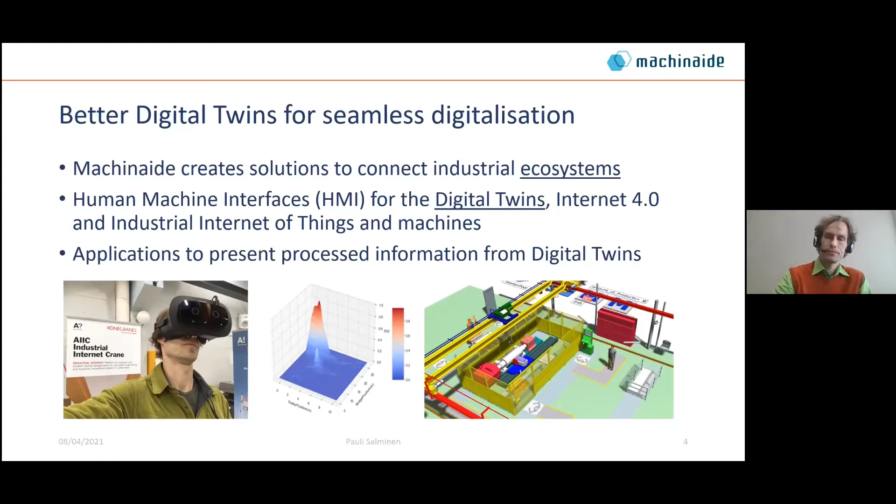The work in the Machinaide project has been divided into different work packages. To give some examples, the Turkish consortium is responsible for running work package 1, about use cases — I'll explain Finnish use cases briefly later. Then we have interoperability between digital twin ecosystems, which we are responsible for here at Aalto University.

Then there's a Dutch work package on processing of multiple digital twins' data, which we also participate in — some presentations today relate to this topic. Then we have innovative human-machine interfaces for digital twins and services, and today we'll see an example and presentation about this development.

Then we have information usage across the machine lifecycle, and a sixth work package about business models. This is mainly run by VTT here in Finland, about how to make business out of this development.

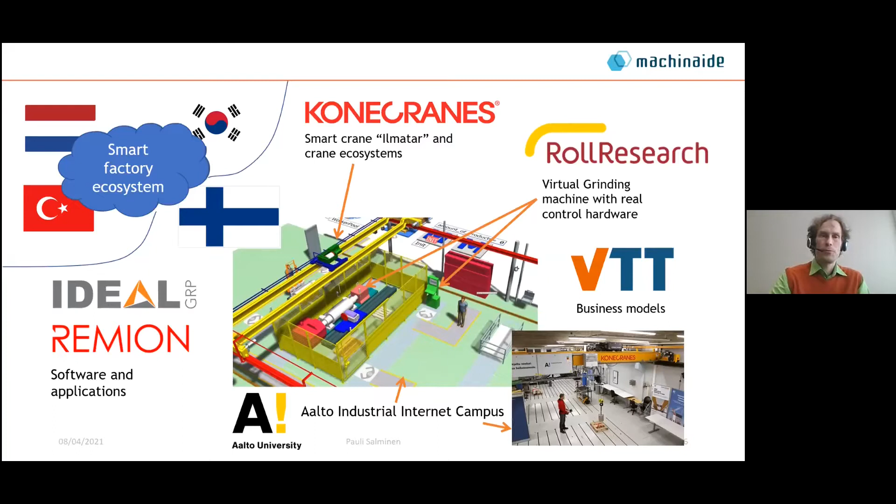I hope you now have a better idea how the following presentations are related to each other, and how these are related to this Machinaide project. Feel free to present questions, and I hope our following authors can also reply to some of your questions later on today. Thank you.

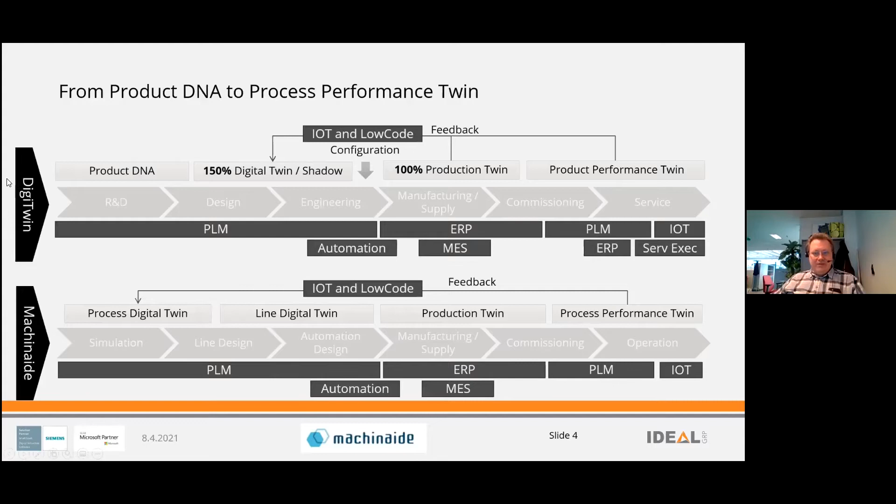So why? We wanted to basically start by understanding the basic needs, and our way of thinking is we want to add business value to just about everything we do. We have been running this with Jira, so we basically started with use cases, and we have a multitude of them. I took a couple as an example of how we were thinking about it.

We wanted to basically answer specific use cases. So you have cases like, if you are a manufacturing process supervisor, you want to be able to replay the actual process that happened. If something strange happened, you want to be able to view it, replay it, and get an understanding of the process.

Since we are connecting information from multiple places, we want you to be able to access it from one place. For example, if you're a service engineer, you want to be able to access the whole history of the actual service, get the current as-maintained BOM to facilitate all the repair actions, so you don't need to wonder what is actually installed — you can just look in the app.

And we really wanted to have the capability of improving also the process performance, so you should be able to improve the process with this and analyze it. So that's how we thought about it.

So how did we then go about this? We created a plant simulation, a digital twin of that, and we created the low code application for the smart factory application, connecting to multiple places. The reason for low coding is that it gives you basically out-of-the-box interfaces to many applications, and development and maintenance is easy and fast.

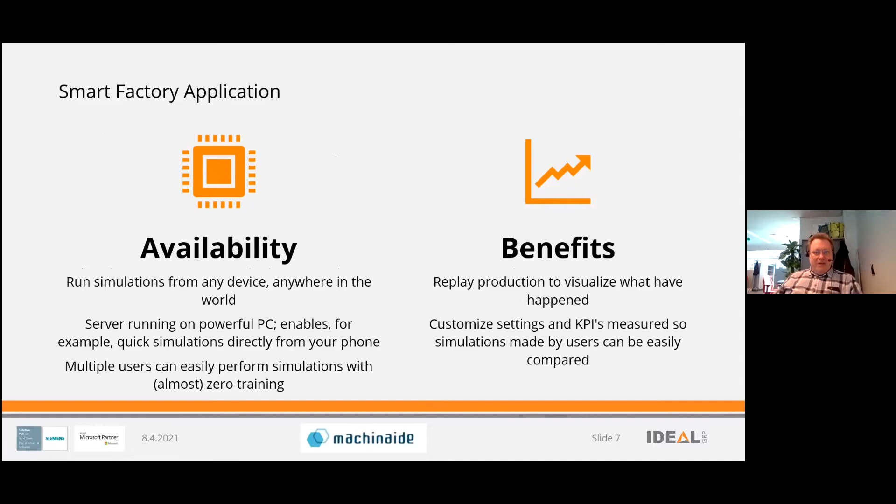So what are we going to do next after this? We are basically trying OPC, accelerated learning, allowing you to do what-if scenarios, predictive maintenance. We are going to be looking into that, doing XR, and we are going to be improving the collision detection — you'll see in a minute when Niklas does the demo — and we are going to be embedding visualization properly into the smart factory app.

All right, so Niklas. Yes.

This demo will show you how you can simulate real crane movements in a browser-based application. To the left, you can see the application we have running in an ordinary browser, and to the right, you can see plant simulation. So in order for us to see better, we will start by just removing the roof. And here you can see the crane.

The crane consists of 3 different parts. We have the bridge, which is the large yellow part. On the bridge, we have a trolley that moves alongside it. And in the trolley, there is a hoist, or a hook, that is moving up and down.

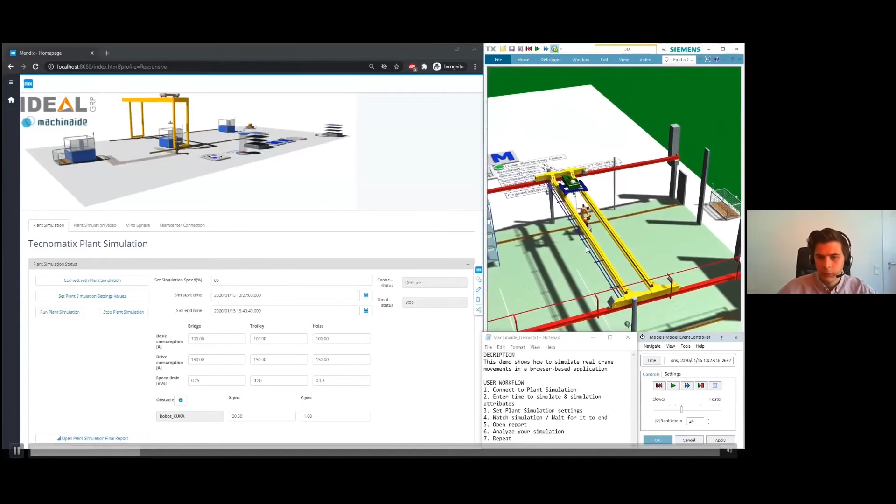When we want to start now, first we want to check that we are connected to plant simulation. So we have a connection status, which says we are offline. We will connect and see it says online, so everything is working. Then we want to select the time that we want to simulate — we can select the start time and end time, and we will take all of the positioning data that exists between those two dates, so we can see what's happening.

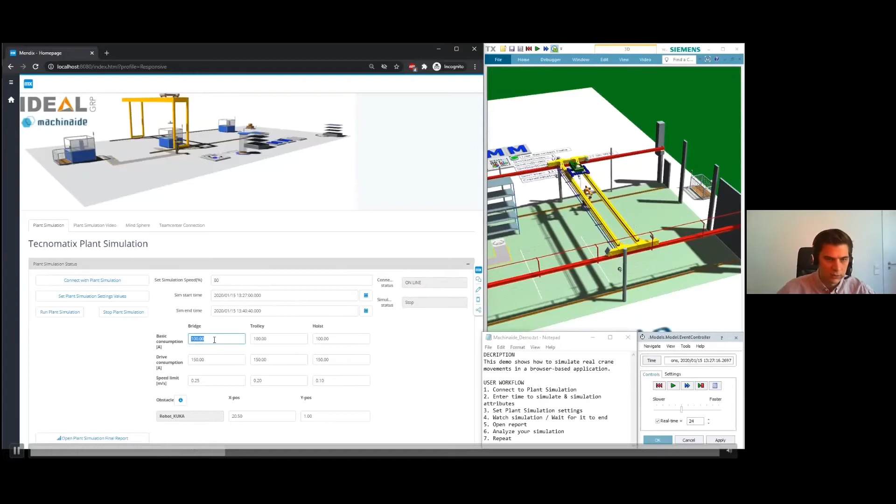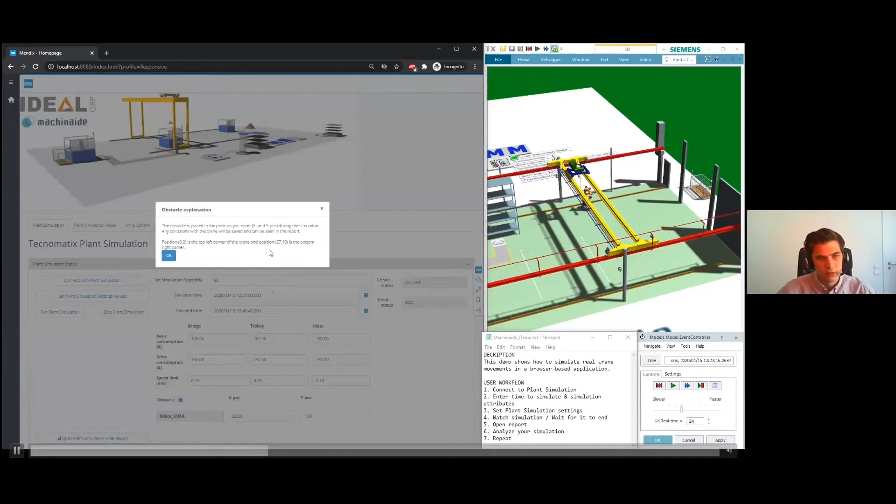Additionally, we can also set some simulation attributes that we can see in the simulation. So we have a basic energy consumption and a drive energy consumption of the parts. We can also set a speed limit, which you'll see a bit later how we use that. And we can also position obstacles in the area where the crane operates, so we can see any potential collisions.

So here you can see we have positioned a KUKA robot in the area at a certain X and Y position, so you can specify where you want to see it. And when we have entered everything we want to see, we can just send this information to plant simulation with the press of a button.

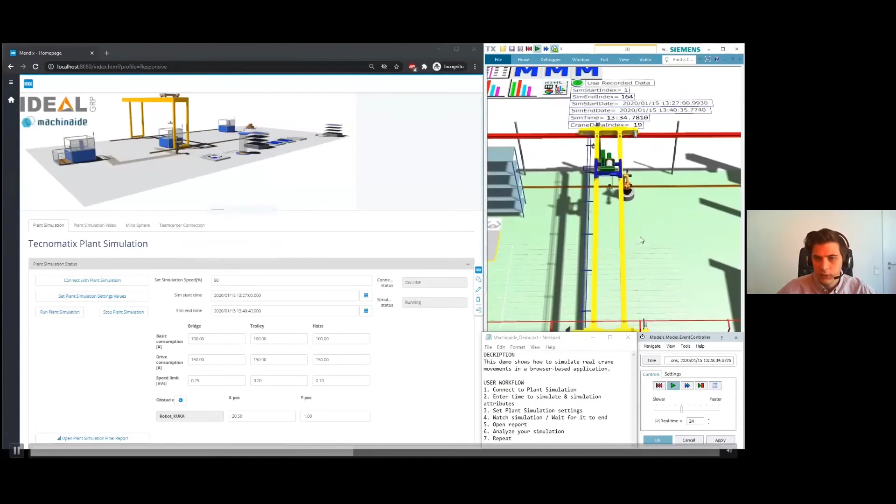And now everything is configured, so we can just start running. And now you'll see the simulation running and how the crane is moving, exactly how it was moving between these two dates we entered. And we can also see that we have some collisions with the robot. Then the robot will be highlighted in red, and when this happens, plant simulation will collect all of the statistics as to when and how long this is happening.

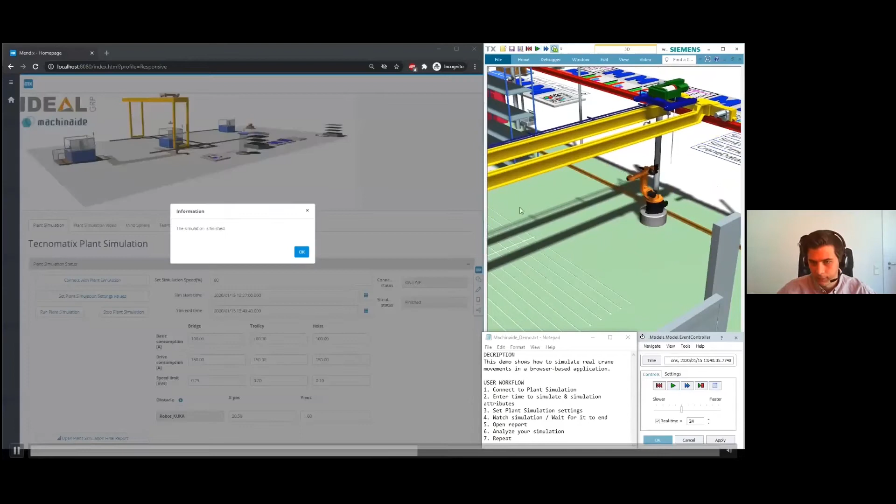So now the simulation is finished, we can just press, we can open a report where you can see information about what we have been doing. And here you can see the main data input, so these are the positioning data of the crane, of the different parts. So the first date you see is the start date that we entered, and the last date is the end date. So here you see all of the positions which we will move to of those crane parts.

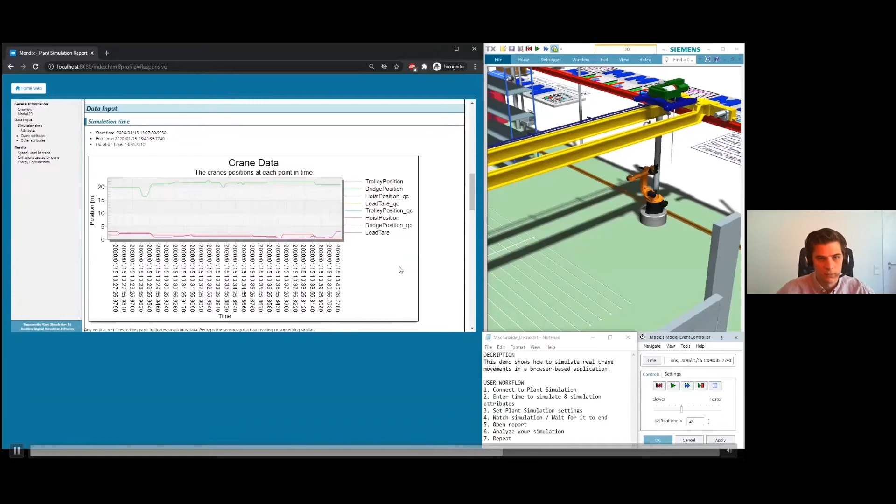And in order to move to those positions, we need to set a certain speed of everything, so this is another result. Here you can see all of the speeds required for the different parts, and then you can also see the different speed limits that we entered. So here you could see, for example, if we have been running the crane too fast, maybe that could indicate if we have any problems or so on. So that's the kind of analysis you can do with this type of information.

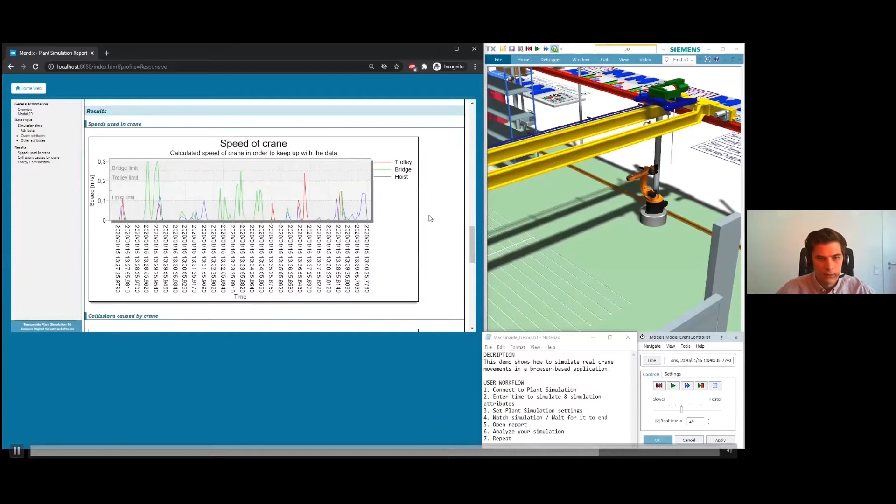And we can also see, we'll just scroll down. Here you can see all of the recorded collisions that appeared. So we can count that we collided with the robot for a total of 5 times.

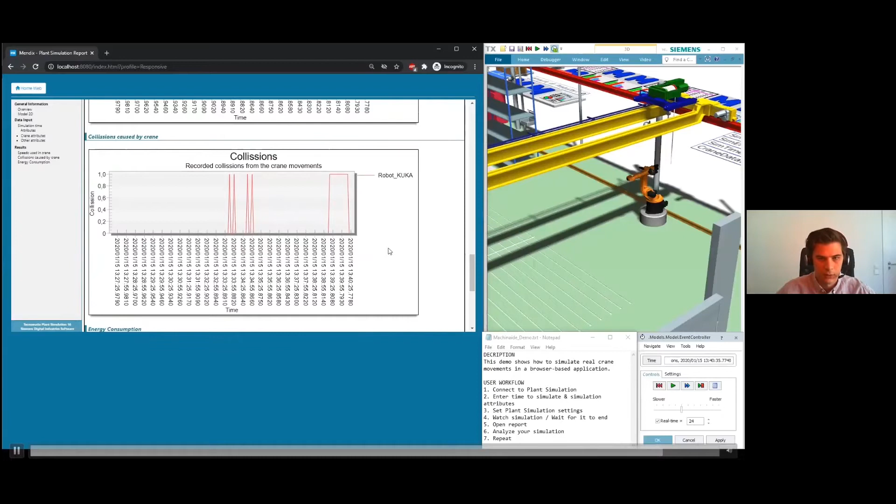So what you can do with this is run the simulation again, where you position the robot somewhere else, so that you can try to minimize or completely avoid all collisions. And we can also introduce more obstacles if we want. And finally, you can also see the energy consumption, the total amount of energy required to run the crane, and how much energy each part of the crane will require.

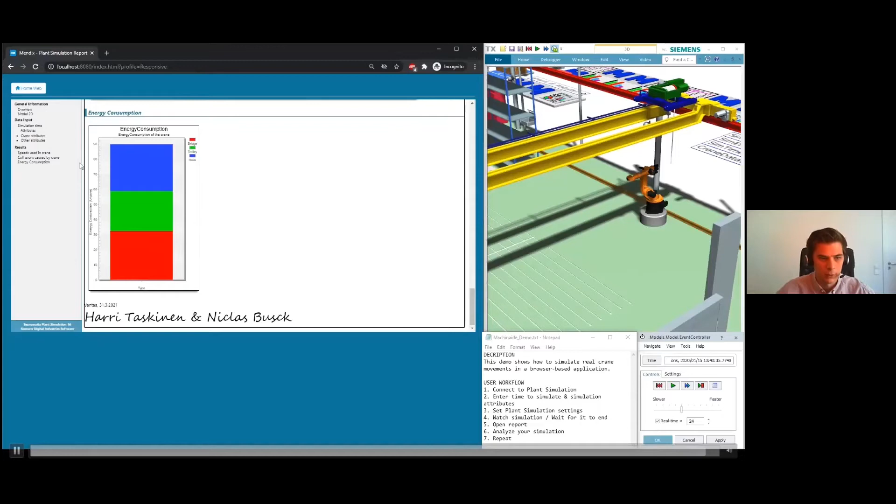So that was this demo. If you have any questions, we are open for them now.

Thank you, Harri and Niclas. Still, I have the luxury of stating my questions, since the questions and answers tab is empty. So can you explain a little bit how easy or difficult this is?

Like, you know, if you have a blank paper and then you have to do this on a factory, what type of data you need, what type of tools you need, how to integrate them all, and how big a job it is?

Well, if I start, basically the plant simulation part, that is bread and butter for guys like Niclas and Fernando. That should be quite easy. The application part itself, where we wanted to have the interfaces, that is the low code part. And we didn't mention the low code we used. We selected Mendix for that, and it comes really with out of the box interfaces. So as such, it's not that hard to do, but there is a little bit of a learning curve for that. Once you get past the learning curve, things get much easier.

So overall, I wouldn't say this is extremely difficult, but it is not easy. You need some coffee and breaks to do this, but otherwise we are not talking about huge rocket science. It is definitely doable, but it will take you some time.

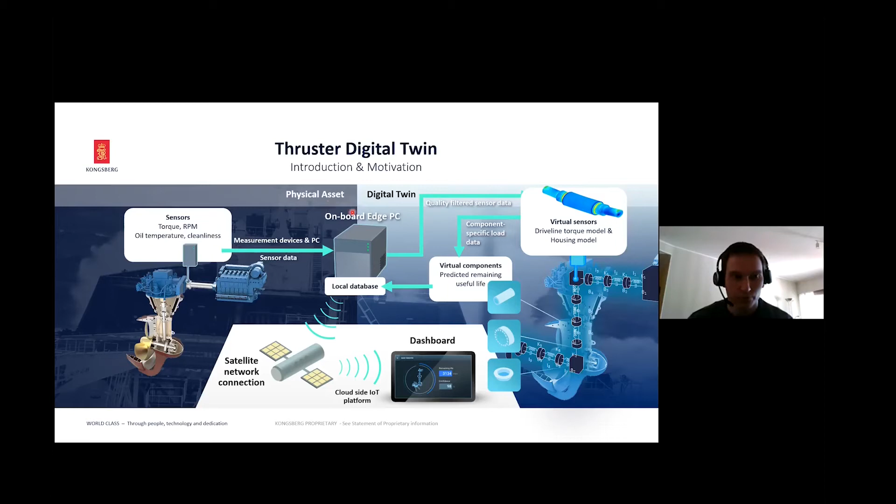But naturally it's a rather complex one, and there is lots of research behind it. So I think Jesse will next take us a little bit deeper into the sensors and how this actually works on that part. Or actually, maybe Sampo, you can go ahead, you had a couple slides.

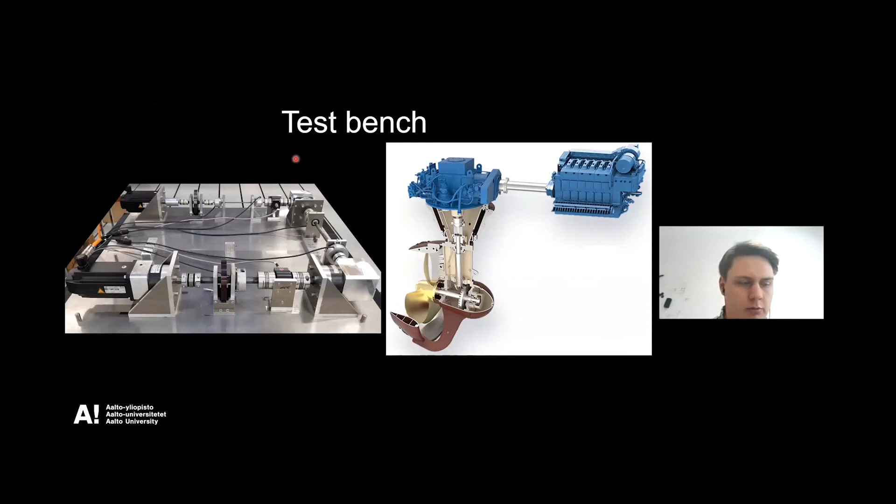Sampo, are you there? Oh, can you hear now? Hello? Yes, we hear you, Sampo.

Yeah, okay, so I'm Sampo Haikonen, and I will now, before Jesse, briefly tell you about the digital twin test bench for torsional vibrations that we have built here at Aalto University.

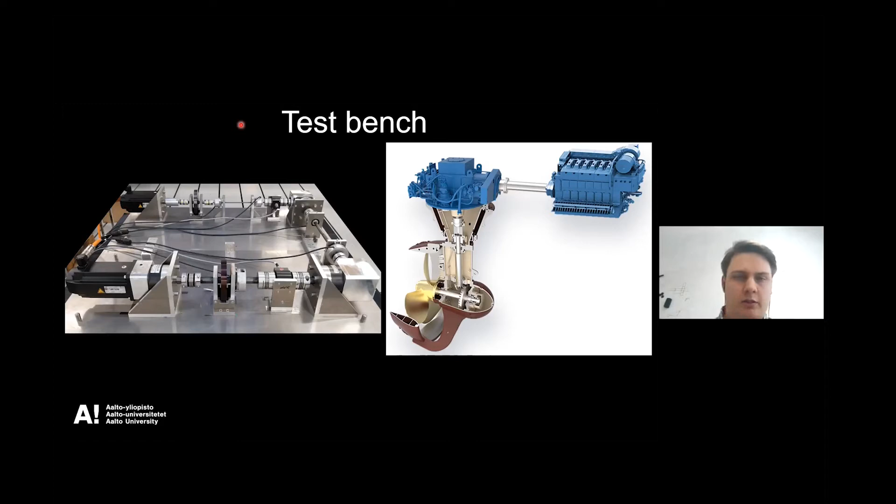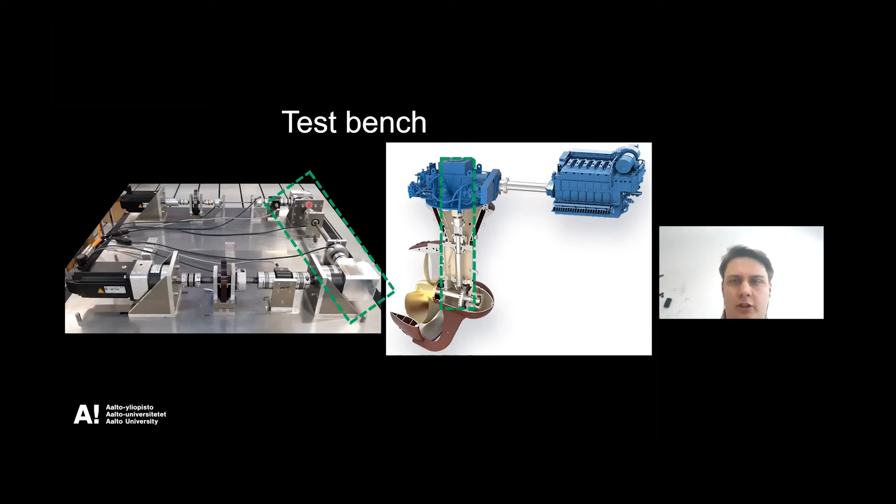This test bench on the left is basically a downscaled version of Kongsberg's Azimuth thruster. And this test bench represents the thruster by having first an engine and engine shaft, two angular gearboxes connecting a long shaft, and of course a propeller and a propeller shaft.

Now, this test bench was built for the development of a digital twin, so we want to simulate multiple conditions of the thruster. For that, we have a driving motor with which we are able to drive the system at various desired speeds. And on the other end of the driveline, we have a load generator, which represents the propeller part in the model.

With this load generator, we are able to generate any conditions that the propeller might face. Typically these are, in our experiments, for example, the propeller blades colliding with ice, or the whole azimuth thruster rotating 180 degrees.

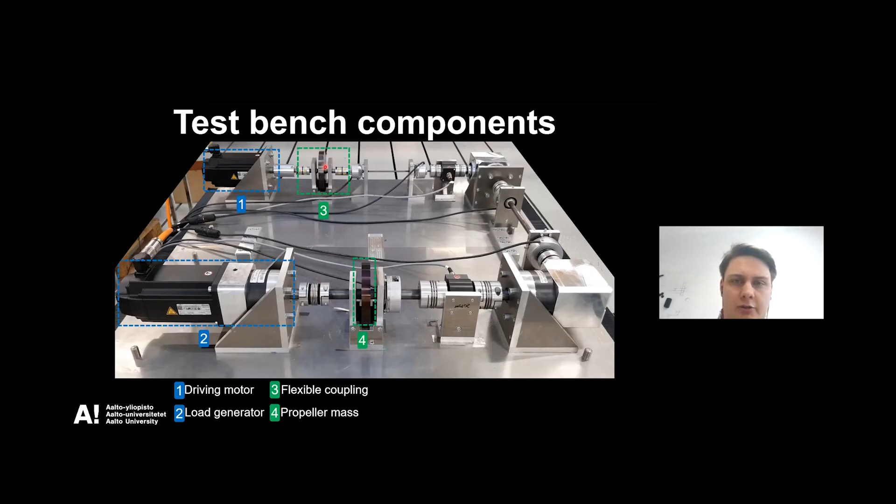And since this is a downscaled version, we wanted the torsional characteristics to remain similar frequency-wise. So we added two flywheel masses to the driving end of the driveline and to the propeller side. The engine shaft also has a flexible coupling to further reduce the torsional natural frequencies.

Since this test bench has been used for simulation model validation and for virtual sensor research, we want to measure the states at multiple points of the system. For that, we have 5 incremental encoders, which give us instantaneous angular velocities, and also the 2 encoders on the driving side and on the vertical shaft give us the torsion of the shaft. Lastly, we have equipped our system with 2 torque transducers for torque validation in our measurements.

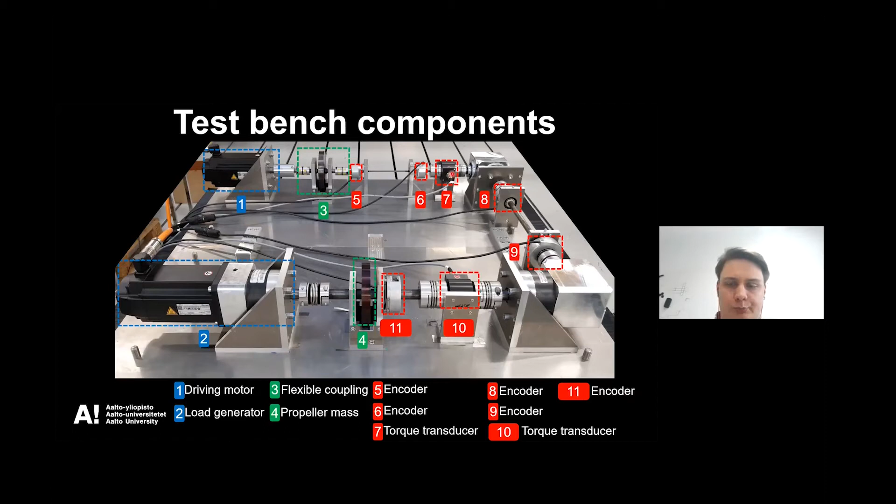And now to you, Jesse. Thank you. Share screen - there we go.

So yeah, I am Jesse Miettinen, a doctoral candidate, working in the same group with Sampo. And we've been building this virtual sensor for the thruster.

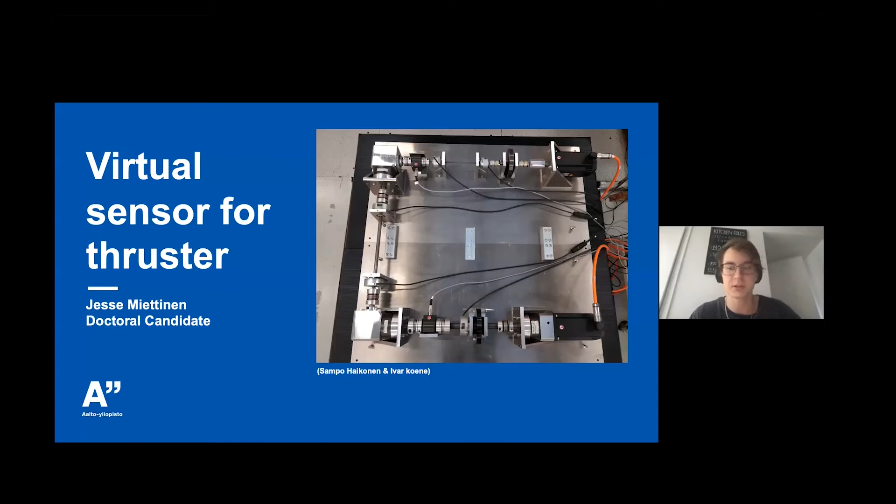Basically, what is a virtual sensor? It is a computational model that estimates sensor readings from other sensor readings. It can be useful if you might want to have fewer sensors in your system, or if some sensor is broken, so you might have a way to get secondary information from the sensor reading that was broken.

If you want to build a data-driven virtual sensor, that basically means you are using a machine learning model to do the same thing. Whenever you build a machine learning model, you need some data to train the model with, and then to test it.

In this research, we've been generating the training data from a simulator built by Kongsberg and Åbo Academy, and then we get the test data from the test bench that Sampo just presented and built. And here are some preliminary results.

The first three upper sensor readings are the input data for our virtual sensor, basically the encoders Sampo showed, and one torque sensor reading. The lower four are basically what our virtual sensor estimates - the red curves are the virtual sensor estimates, and the blue curves are what we have been measuring with the test bench.

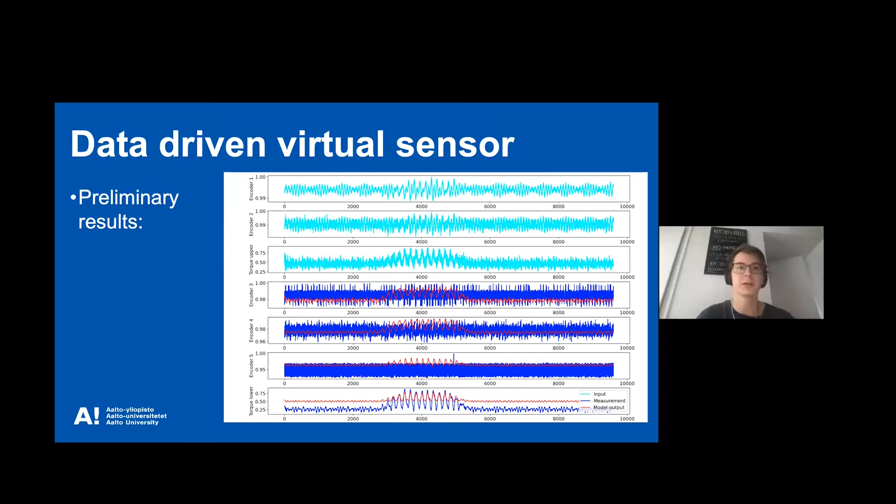Okay, now we luckily have actually 2 questions from the Q&A tab. Ville Lämsä asks reasons for systematic errors - I believe it's the last plot here. We've been having a conversation about it, and it's most likely due to some losses in the gears. So we train it with the simulator, and the simulator is slightly different to the test bench in a way that there are some losses in the torque happening in these gears.

And then the other question is how general is this virtual sensor term - the question is by Markku Juntunen, asking how general the term is, if it's commonly known. I think it's not very common. More commonly known is actually a soft sensor. If you look at research publications, people use more soft sensors, especially in process industry. The soft sensor is more common, but I think in industry, virtual sensor is more used.

Yeah, indeed, I agree, but I think you very nicely started your presentation saying that this virtual sensor is actually a piece of model or piece of software which is estimating a signal in one place you cannot measure for some reason. And this actually leads to the third question by Raine Viitala - he asks what type of savings you are possibly achieving by using a virtual sensor instead of a physical real sensor.

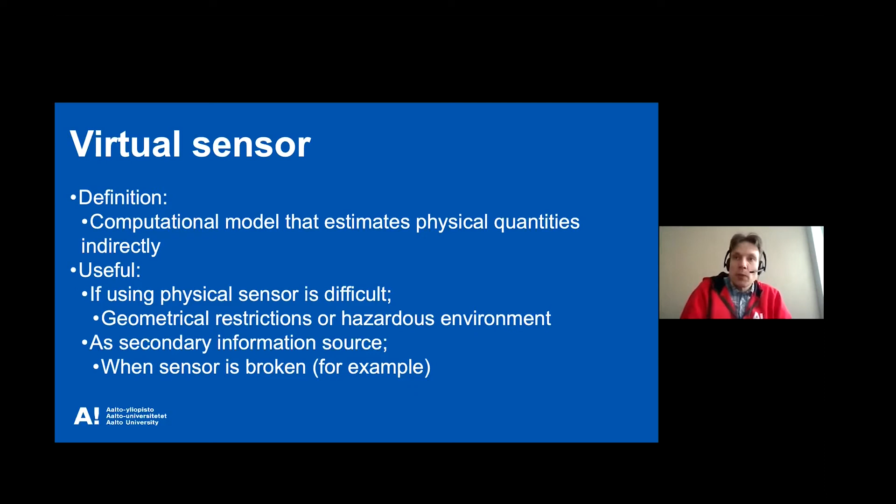I also agree, and I think there is a nice connection to the last question. I'm going to read it - it's by Viktor Chichenko, and he asks about the differences of the real system and the physical model of the system, if you have different parameters. You actually have always differences between the model and the real system. What are you going to do with the variations or differences?

Well, for example, if I understood correctly, the system or model that we use to generate the data might be different from the real world - that's the difference between simulation and real world. So here we actually sampled 10 different systems with randomly selected components for the simulation data, and used basically 10 different mechanics of a thruster to generate the data, and then we tested it with the real data. So one trick you can do is basically build varying dynamic systems in the simulator to make it generalize to many systems.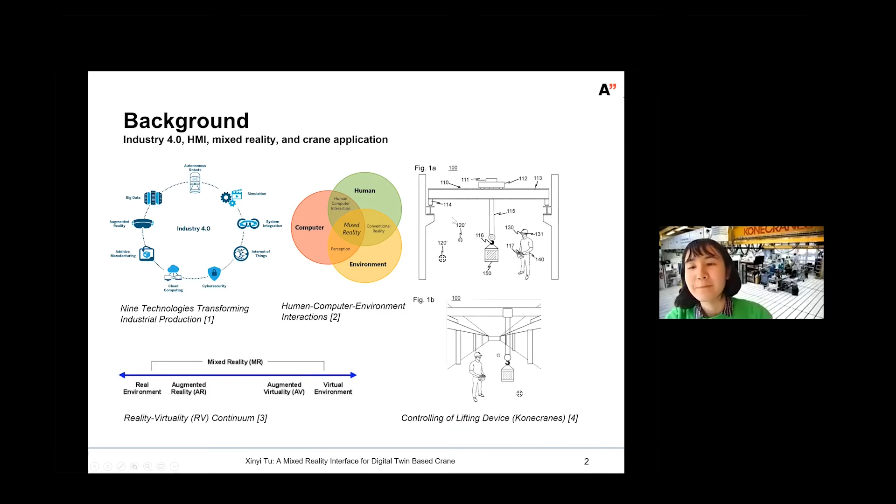As a case study, we utilize the Ilmatar innovation environment located at Aalto Industrial Internet Campus as my virtual background, and conducted research on the crane platform equipped with digital twin systems. Now let's directly dive into the prototype I built.

I drew this picture to illustrate the prototype setup, architecture, and workflow. The hardware and software setup consists of two parts. One is the Microsoft HoloLens One device and the corresponding software and SDKs used in the mixed reality app development as listed here. The other part is the crane Ilmatar and its operational environment, embedded with its software system for data access and networking solutions. Based on this, the architecture and workflow are formed.

Overall, users can interact with the crane in a bidirectional manner, controlling and monitoring through the MR application using HoloLens One devices. Within the mixed reality application, functionalities are grouped into modules: interaction, visualization, registration, and communication.

The first is the interaction model, with two functionalities: fixable and movable target control, where users can either select any of the four fixables in space, or pick up and place the movables to navigate the crane. I will elaborate more in the demo video later.

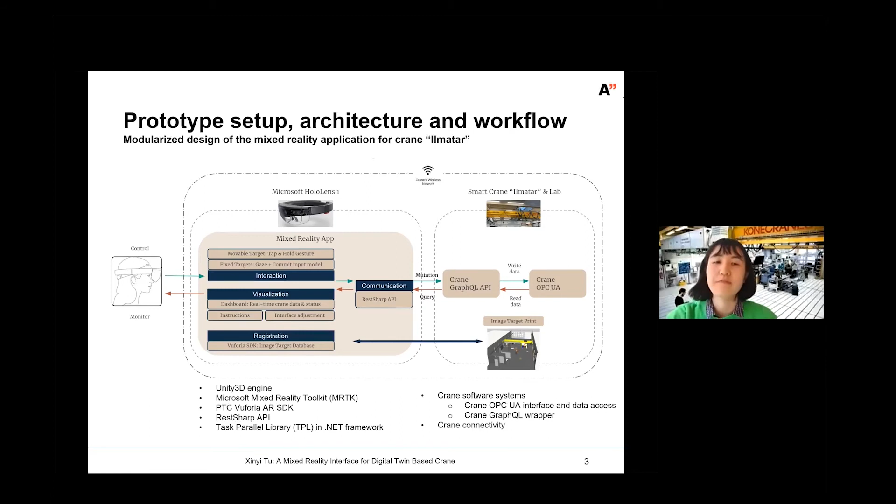Last but not least is the communication model, which functions as a bridge between the crane and the other modules of the application. I will elaborate more about the communication model, as it's a key component for the HMI for digital twin-based services. There are different functionalities that consist of this model in this specific application.

One function is for input, the access code and changing the watchdog value; one for sending control signals according to the input from the interaction model; and one for monitoring the crane status as input for the visualization model. And here we use the RestSharp API.

This API is used here to send the HTTP request to the GraphQL server. The multi-threaded behavior is also experimented with, where the three functions run in different threads in a parallel manner. Also, different settings of request frequency, size, and timeout were experimented with and selected to determine a decent communication performance for this application case.

Here I will show some demo videos captured by the HoloLens device camera, so you can have a taste of the workflow from the user's perspective. So when you start the program, the instructions phase comes first.

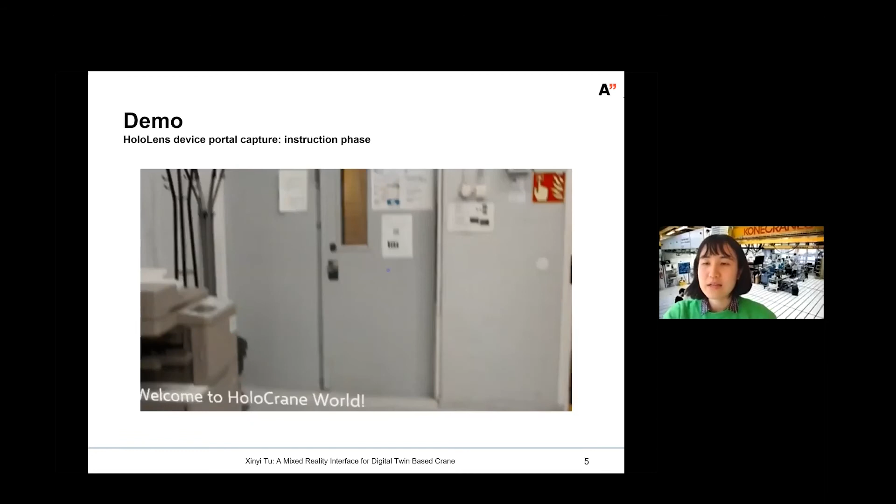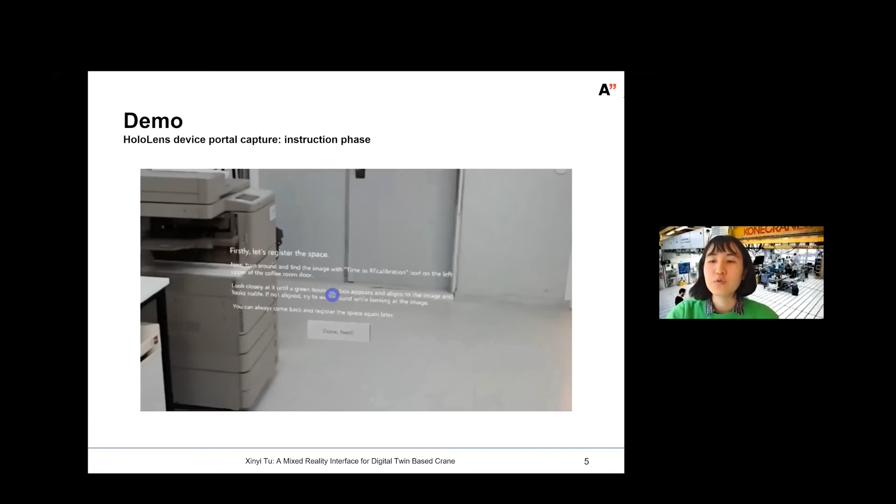You can first see the welcome page and it guides you to the registration phase. Once it's done, the holograms appear, followed by an explanation on them. After this, you can either choose to directly start or go check the three-step guide on what you can do in the app.

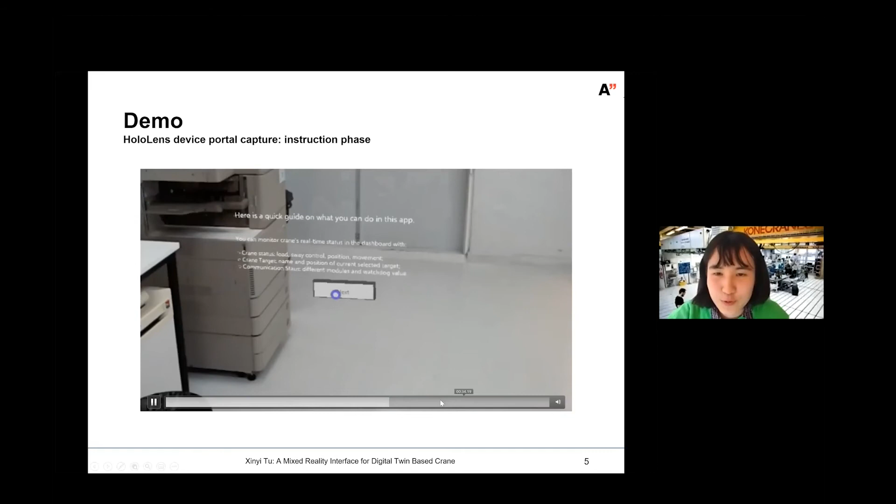It's a bit low resolution from the HoloLens capture, but okay, the next one. So this is the instruction phase, and this video starts with the registration phase.

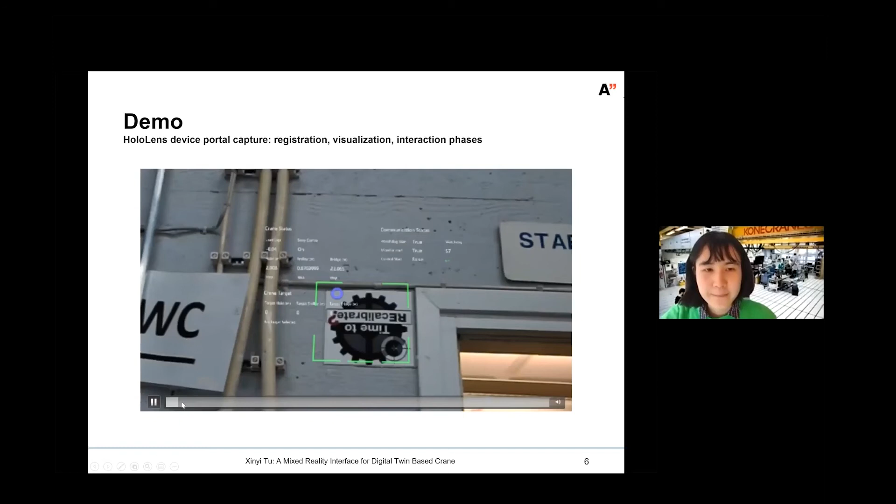Once the green bounding box is aligned and stable, it means the registration is done. Like so, you align the hologram with the physical world. Then the virtual target will appear in the space correctly.

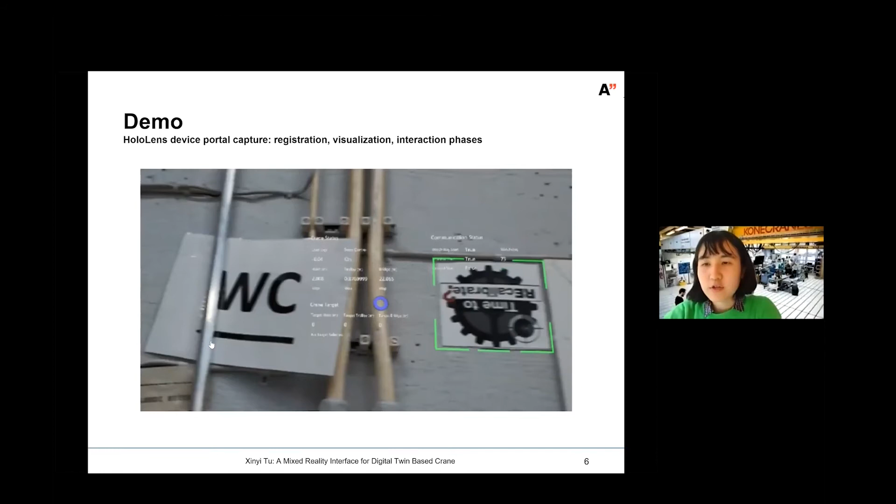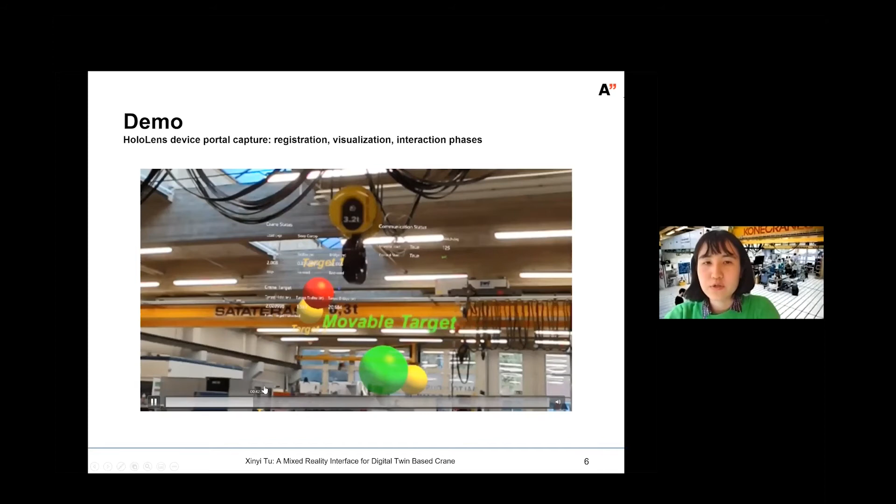You gaze and tap on the fixed ball. Its color changes, and the crane will move towards it, with info on the dashboard updating in real time.

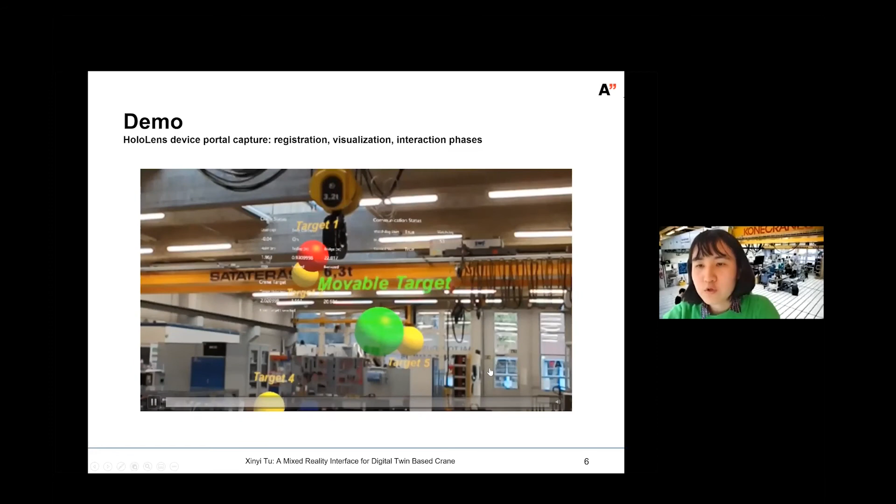Then you can also pick up the movable target, and a spatial mapping mesh also appears where you are navigating around the ball. Once you place it again, the crane will start moving towards it.

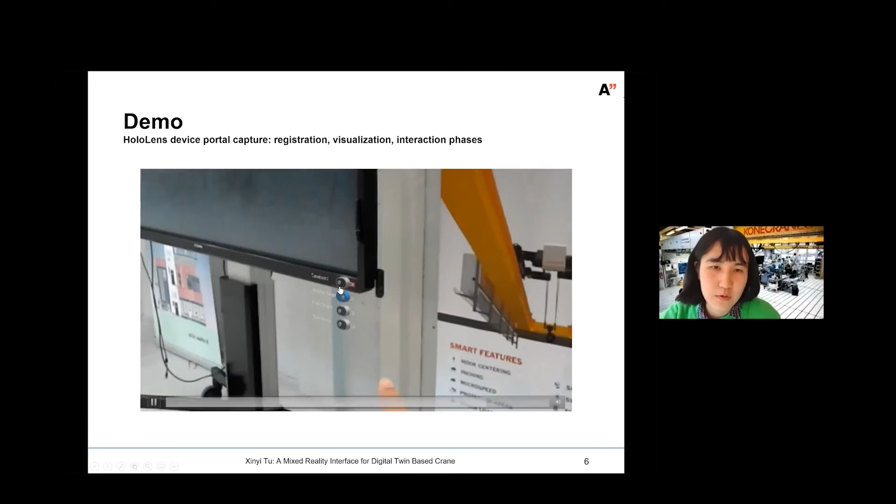Stop it somewhere. Also here, there is a scene adjustment interface. You can disable and enable different holograms, like showing the dashboard, hiding different targets, and recording the quick guide whenever you want. Yeah, that's basically it.

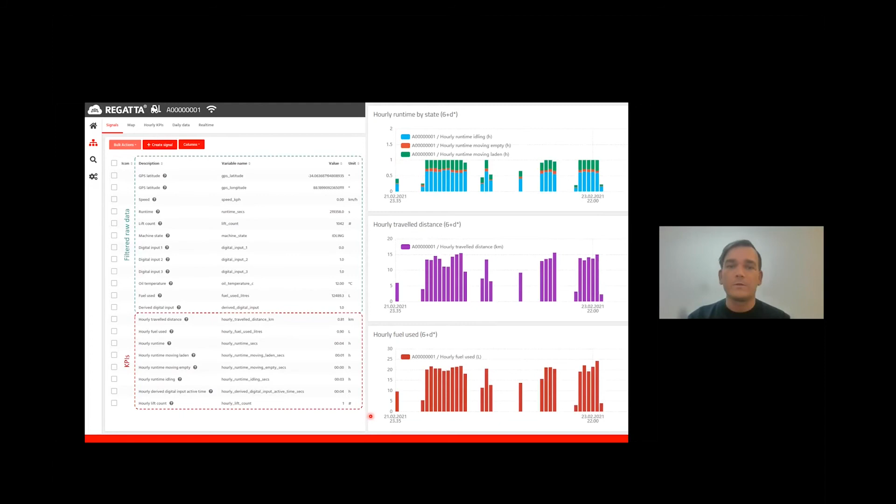So having deployed this application and run it in AWS, we want to know about the scalability of this type of architecture and how it would perform. And here we performed a 24-hour stress test for these purposes.

And we found out that these Kinesis data streams, as defined here with the 8 shards, were able at the ingestion path to process one day's worth of data. During this one day, when this data was processed, we were able to process 6.2 times the data, so 6.2 days worth of data. That equals that real-time rate. And in that 24 hours, we would be able to process 300,000 assets in this Kinesis data streams.

Well, the interesting figure is then how much data in this time we could process in the Kinesis data analytics using the 32 virtual CPUs that could be scaled up. And we found out that we were able to process 3.25 times the real-time data rate the data was coming in. And that would equal 160,000 assets communicating at real time.

Well, then the actual bottleneck of this pipeline that we evaluated was found to be the Lambda that wasn't scaled up enough, so that the data itself that was written to the Regatta portal and to the time series DB was 1.5 times the real-time rate. So that this would equal about 75,000 assets that could be processed real-time with this setup.

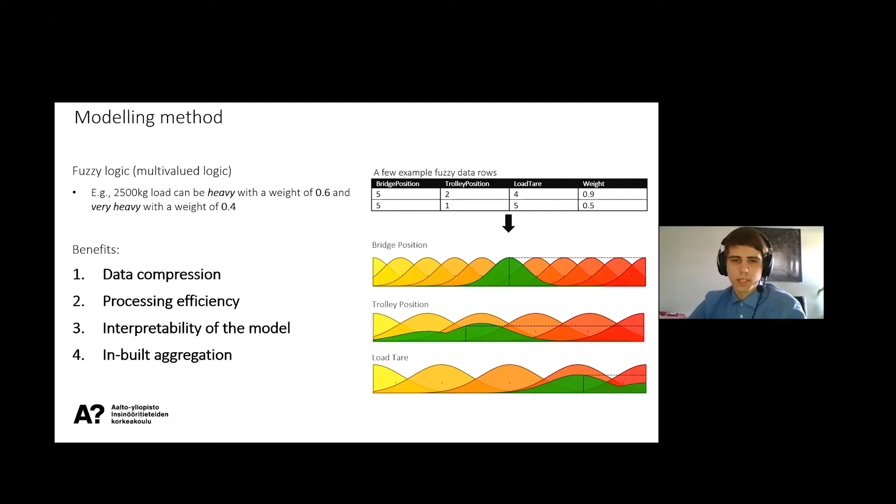From this, we can easily move to time series type of modeling by introducing time or other defining variables, such as alarm data. This way we can view the model in any state.

Here in this animation example, I've added an alarm signal and time as defining input variables. On the left you can see the input variables, and on the right you have the output variables.

Now in the animation, you can give different values on the input side and see how the system has behaved. So for example, you can give that when there is an alarm on and the time is between a specific interval, how did the model behave?

On the left, I have a few example data rows again. There, as added columns, there are now the defining variables, time and alarm.

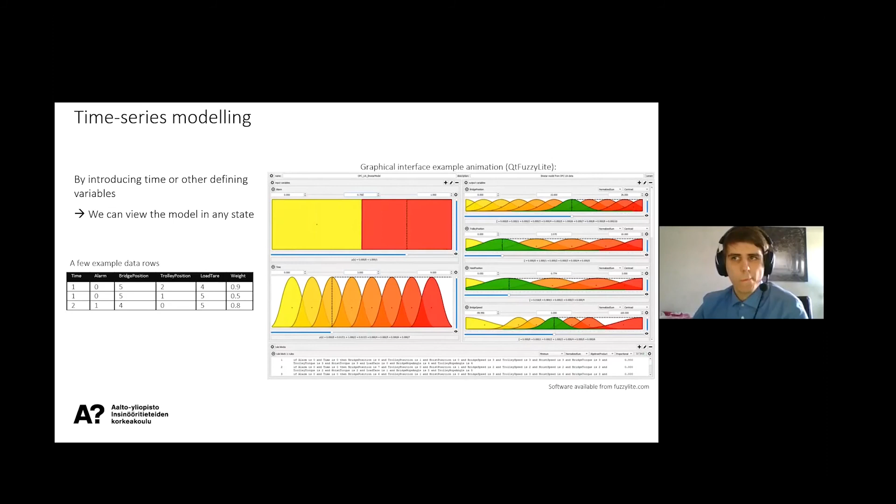Next, I can show you a few visualization examples. From the model, we can also produce visualizations of joint distributions. This can be done with 2 or 3 variables, and we have multiple different options for the type of visualization.

Here, as an example, we have bridge position and trolley position. In the first picture, we have the raw data points of the path where we drove the crane. We drove it back and forth in this L-shaped path. This data and 13 other variable data was taught to the fuzzy model, and then we can produce visualizations such as these.

One possibility is to draw a 2-dimensional heat map. In the third figure, we have a surface plot of the same data where the z-axis represents the density of the data. The main takeaway here is that we are able to produce accurate results with less data—in the table below, you can see that the fuzzy model needs half the number of rows.

Compared to the raw data model, where the data is expressed as exact values, this combined with the fact that ordinal numbers require less memory leads to 80% smaller file size. The same trend can also be seen in the amount of data needed to make the visualization happen. When we produce it with fuzzy methods, we're able to aggregate matching rows together in the database and only bring the aggregated rows to our visualization.

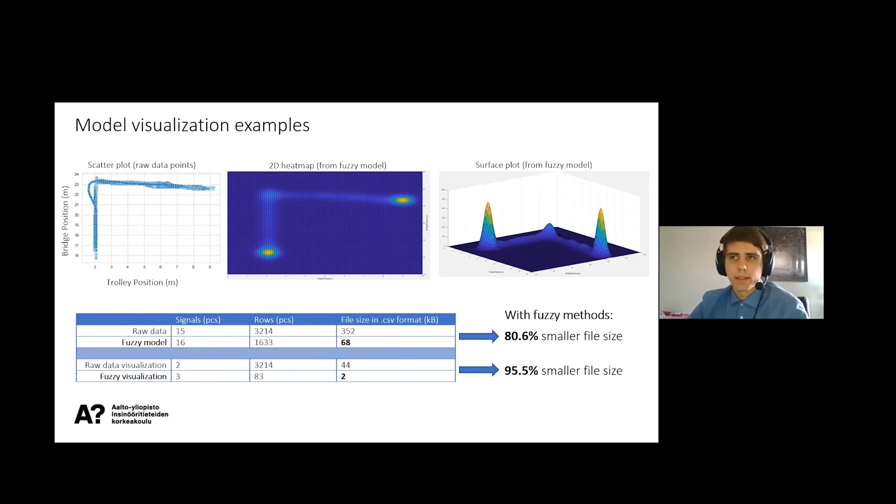Another thing you can do is produce a prediction model to predict a certain amount of time forward, and you can do this recursively as far as you want. Here's an example: a simple cumulative machine usage signal which we have predicted. The signal has a clear trend underneath the randomness, and we can easily find the trend with the fuzzy prediction model. In the learning phase, we store the state of the model and the state of the machine one time step after that. So when this formed model is given some state as input, it gives the prediction based on all the times the same state occurred before. Then we get a precise prediction value using the defuzzification process.

For a cumulative signal, we can't use absolute values for learning, so we have to model from differences between consecutive values. As another example, you might have a sine wave. Here we can apply the same logic, but now we can also use the absolute values for learning. We can also see that the further we try to look ahead for a signal like this, the bigger the error will become.

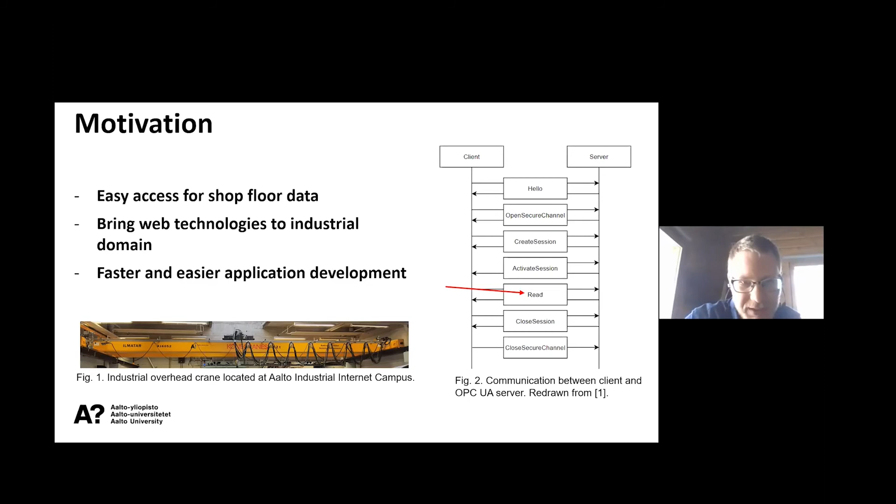I will quickly introduce OPC UA, because I think many of you are already familiar with it. It's a standardized protocol for industrial communication, developed by the OPC Foundation. It works with almost any devices, from embedded systems to cloud, and with Windows, Linux, and almost any device. It supports both client-server and publish-subscribe models, but in this work we used only the client-server model, in which the OPC UA server provides services which we can use to read and access the data.

The data model of OPC UA is kind of a graph or tree. There are nodes which represent variables or real-world objects or parts of machines, and then there are relations between those nodes, which describe real-world-like relationships.

REST is a very popular way to implement web APIs. I would claim that almost every web page uses REST to get data, and it describes the overall architecture in the web. Fielding presented this architecture style at the beginning of this century, and it has been used since then. It's commonly used with APIs to provide machine-readable data, for example, this could be used with the Crane to provide machine-readable data. The basic idea of REST is that it uses HTTP, and clients ask for some data, then the server returns that data to the client.

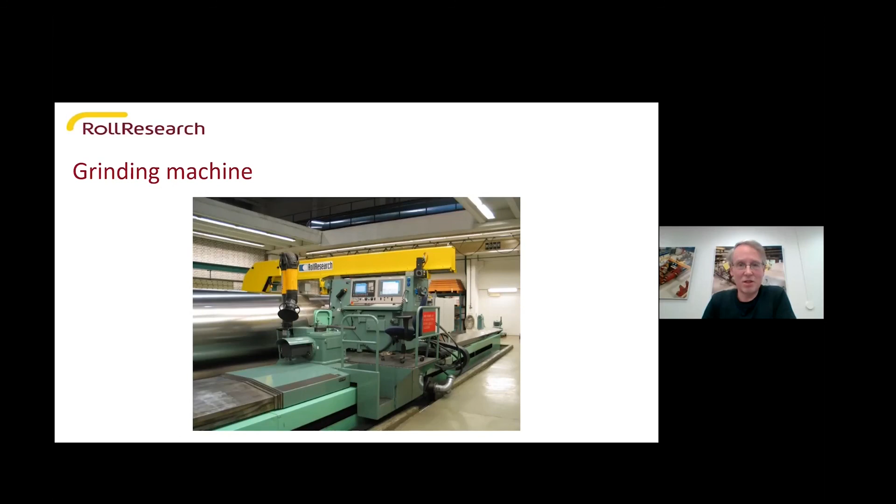This is a typical paper mill grinding machine. Also from the other side, the yellow part, there is a measuring device to measure the geometry of the paper machine roll. The roll here in this machine is roughly 1 meter diameter and maybe 8-9 meters long.

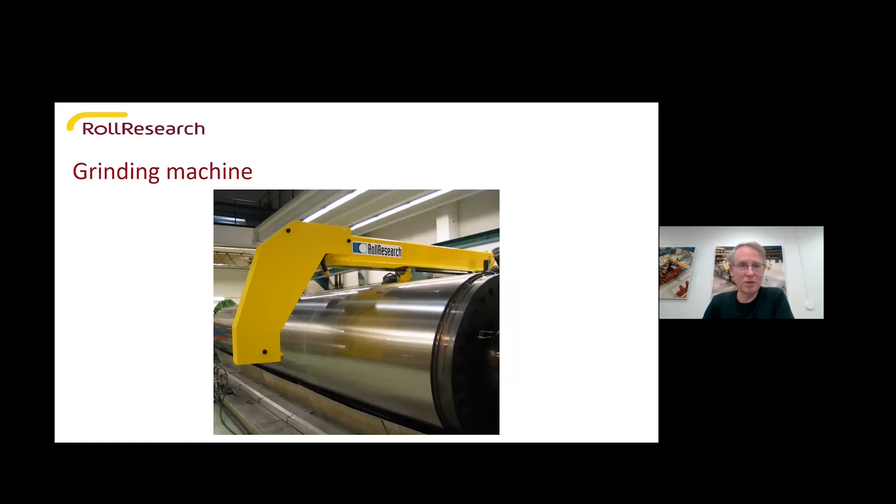As I said, we are getting most of our turnover from modernizations. In the modernizations, we have to also install quite many things and do commissionings and so on. Here is a new measuring device installed on the old grinding machine, some other new parts also.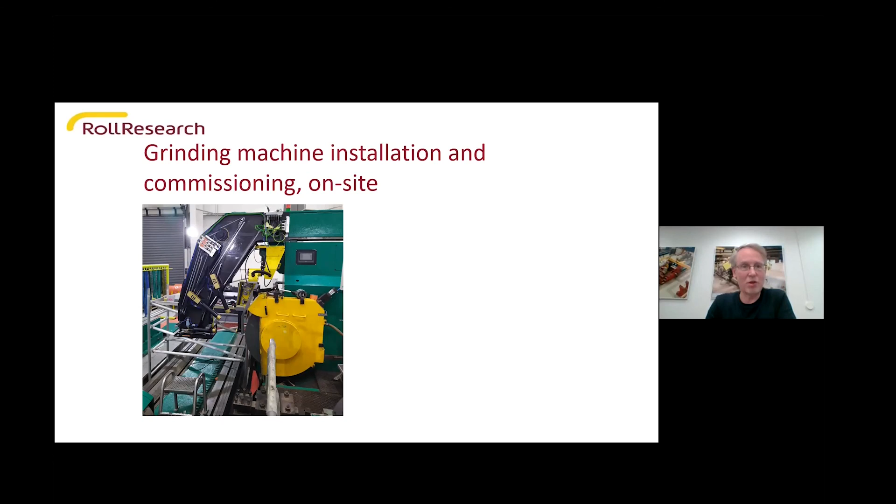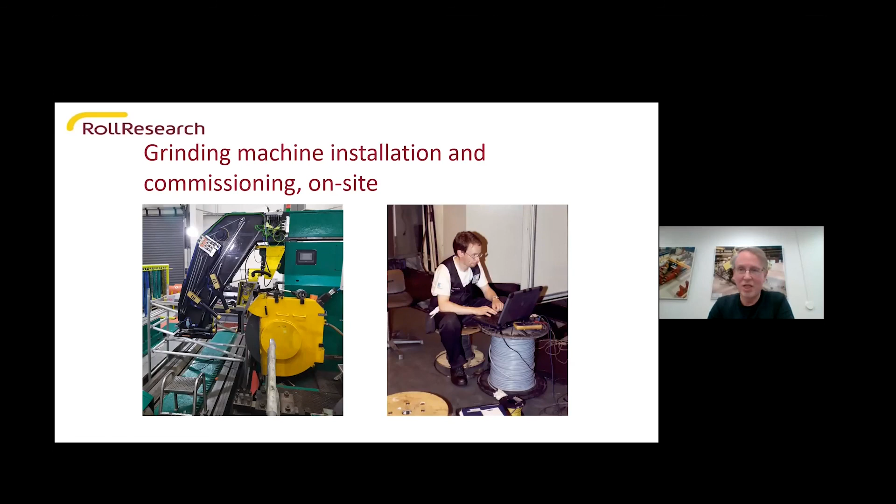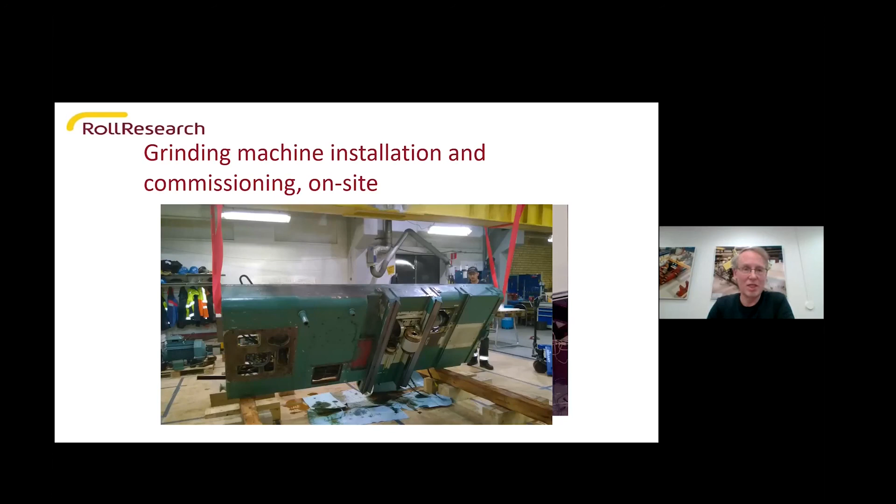Then we do some commissioning on site. Here, me maybe 20 years ago on a grinding machine installation site. And of course, this sometimes belongs also to lifting of heavy parts, like here the carriage of the grinding machine. Many other things happen on site.

Here is a brief layout from an automation system, control system of our grinding machine. Of course, they vary a little bit from machine to machine, but this is quite a basic layout.

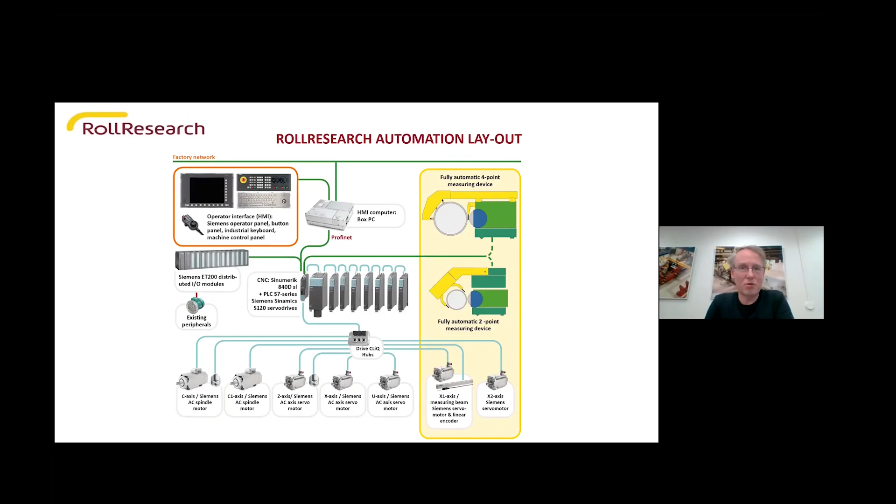Then the common modernization projects that we have - the best one for us is the complete modernization. Then everything is modernized in the machine, both mechanically and electrically. All parts are overhauled or replaced with new mechanical parts. New devices can be added to the grinding machine, maybe measuring devices, balancing devices, etc. Then there are new electric cabinets, new motors, new control system, and so on. And because we provide all the parts, we can test them here at our site before we go to the customer. And that is very good for us.

Unfortunately, many of our customers want to have a partial modernization. The most important reason for that is that they don't have enough money for the complete modernization, and they choose some steps from the complete modernization. For example, they want to have a new control system, but motors and electrical cabinets and so on stay from the old installation. Because of this, we cannot test the system before we go to the customer. That's why we want to have a virtual grinding machine so we can test it before we go to the customer.

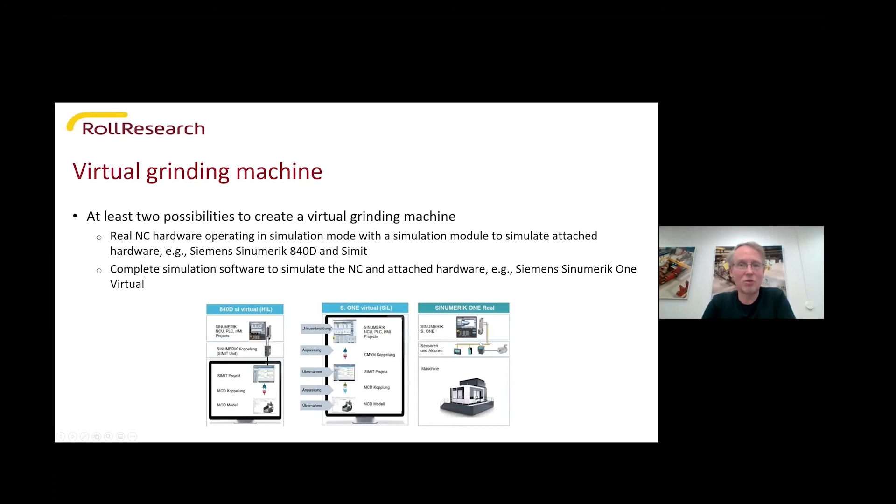But the reasons why we want to have a virtual grinding machine is that we want to speed up commissioning and testing of the grinding machines with the help of this digital twin. We want to create more efficient tools for service, and we can do software development without real hardware. As you could see from the pictures previously, a real grinding machine is up to 15-20 meters long and very heavy, and the price, if you want to buy a new one, is roughly 5 million euros. So we save a lot of money if we use this virtual grinding machine.

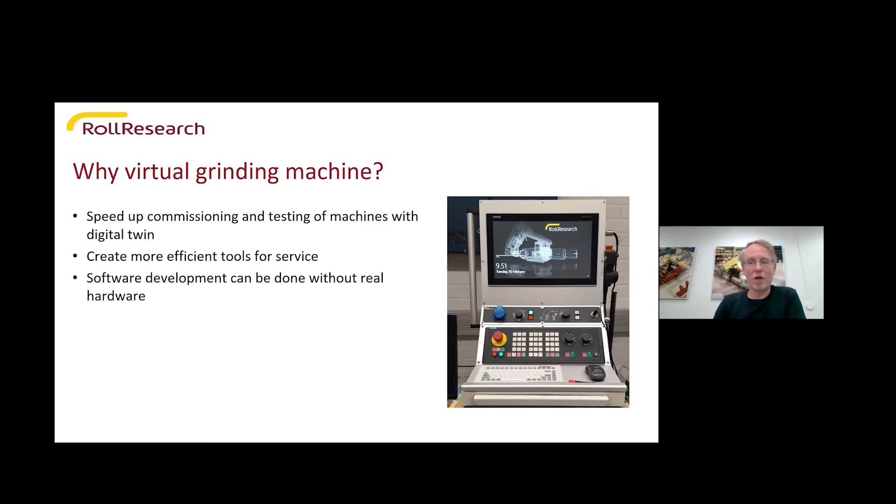So what virtual commissioning and testing includes - we can test practically all software with the help of the digital twin. We can also make some kinematic models from the grinding machine and its environment, but that requires 3D modeling, for example Siemens NX or Tecnomatix plant simulation or some other software that is available. And you can test there on screen everything that the machine does.

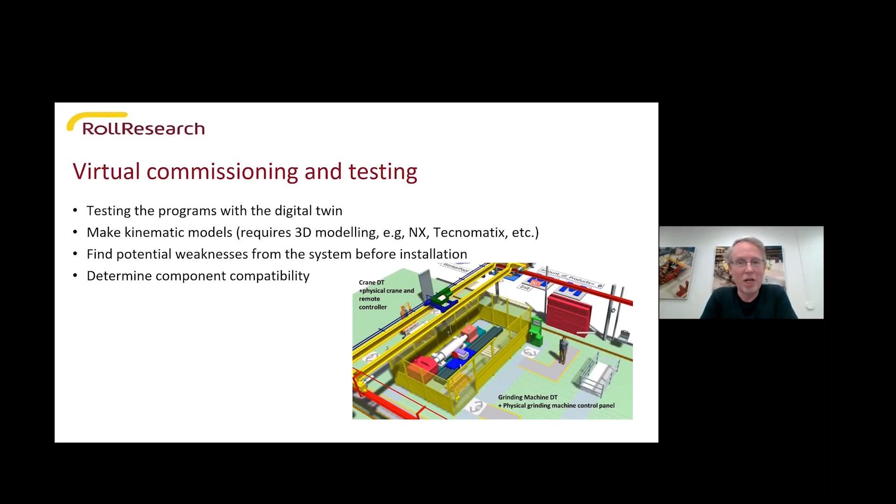Then we can use the virtual commissioning also to find some potential weaknesses from the system before we go to the customer to do the installation. And of course, especially in partial modernization, we can determine component compatibility. For example, if the customer has old components that he wants to keep, then we can test them in the virtual grinding machine if there are some simulation models available for these components. And also, we want to create new tools for service, new innovative tools.

Some tools that have never been used before, not by us or any other company. Then we can use the digital twin to solve problems on existing machines, if we update the digital twin based on the data collected from the real grinding machine.

We can use this data also to create adaptive maintenance programs. For example, we know when it's time to do a service for the machine, when the motors are too old, or when there are defects. We can test all of this with the digital twin if we collect data from the real grinding machine.

One benefit is also that we can have live monitoring of our grinding machines worldwide if we have a connection to the machines. So this was my presentation, sorry again for the delay. This was a brief introduction to the virtual grinding machine, and we will be working further on this subject, but thank you for your attention. I'll answer any questions you have, if I can.